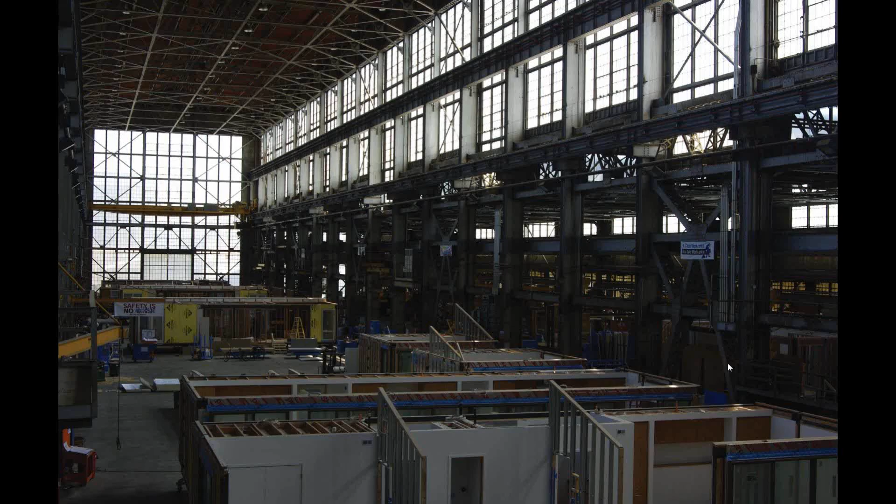So this is what the factory looks like from the inside, and on the right is the line. Here is Zone 1, where they're fabricating steel. In the distance you can see Zone 2. Mouse isn't working, there we go. So here is Zone 2 as well. Zone 1 is all steel, Zone 2 is where they're actually putting in the walls and all the systems, and Zone 3 is where they're doing finish work. Is there a Zone 4? No.

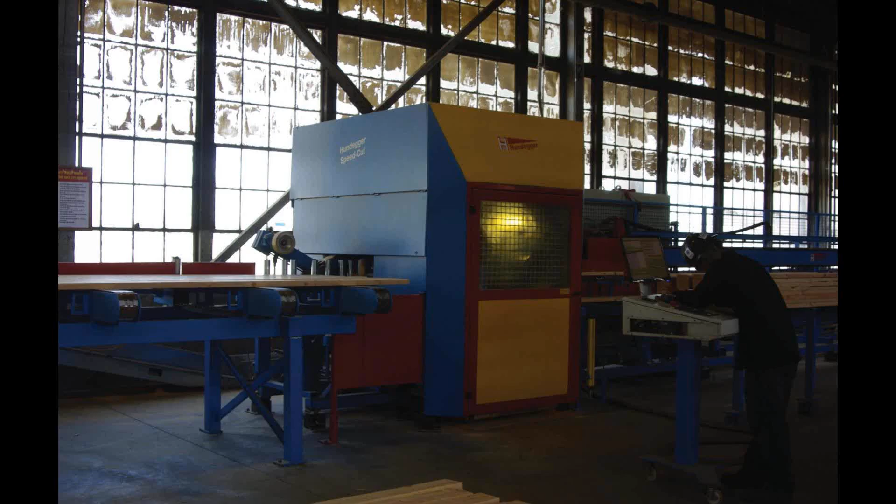Here is the Hundegger, which is actually programmed to cut all of our studs to length. We'll get into that in a minute, what the shop drawings kind of look like in terms of how they input that information.

For some of you that might not know, we used to be using a Newcon system, which is a steel stud system. That machine was incredibly finicky. While interesting and maybe high-tech, and some clients were really excited about it, it was really difficult to work with in terms of its programming, and we were adding lots of wood to it anyway afterwards, so it wasn't really creating the efficiencies we would have liked. So now this is the kind of machine that is helping us with efficiency in the factory.

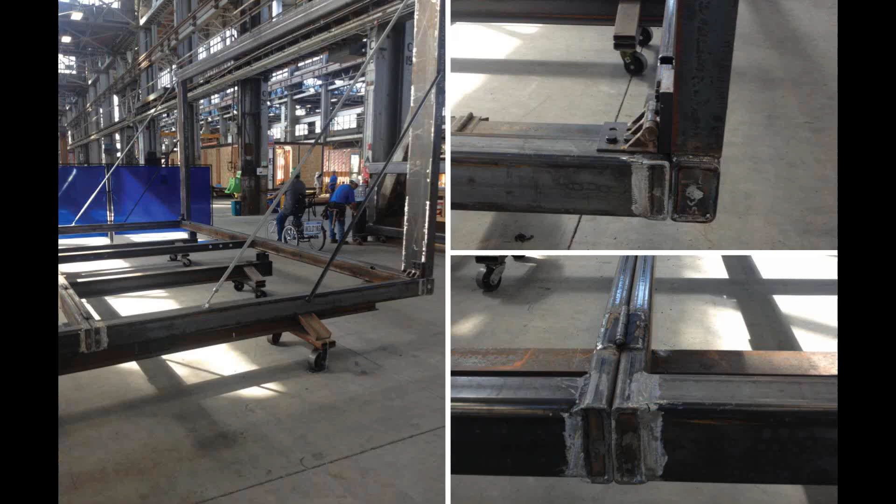Just showing some of the steel details. This is a breeze space, which is a mod C for the breeze house. You can see on the upper right the hinges that are bolted in place to allow this panel to fold down. Then you can see this hinge here at the line of the floor, where the floor would fold up and fold towards the center of the breeze space.

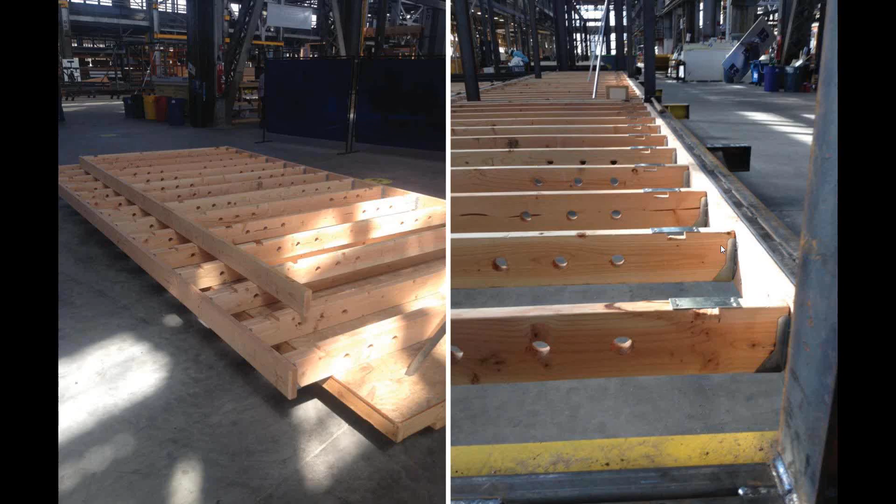These are our floor inlay panels. As you can see, there's actually a rim joist that our joists frame into that's set inside the steel. You might ask why we don't just hang off of the steel - part of that is they want to be able to build these off on tables, so they're not building them in place. They're using the factory for what it's good for, and in theory able to hoist these into place with simple gantries. Right now they're doing it with manpower, which is creating all sorts of problems we'll get into later. But you can see the holes we're creating for plumbing and electrical zones, as well as these notches that allow the radiant to run from one bay of the floor joist to the next. Those are all program cuts into the Hundegger also, so those are spit out by that machine, ready to go and be assembled on the table.

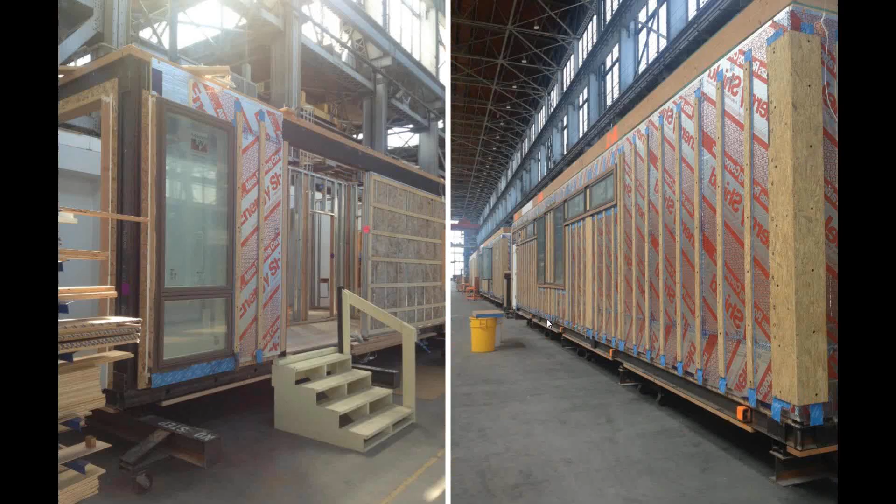So some images of some mods on the floor. Andrew Bodley is not here, he took these photographs, so I'm not exactly sure what projects these are.

But I was really trying to illustrate here both what kind of happens before the sheathing goes on, but then afterwards, after we have the weather barrier and we actually put our strapping pieces that execute our rain screen detail before we put on the siding. So just what that all looks like before the siding goes on.

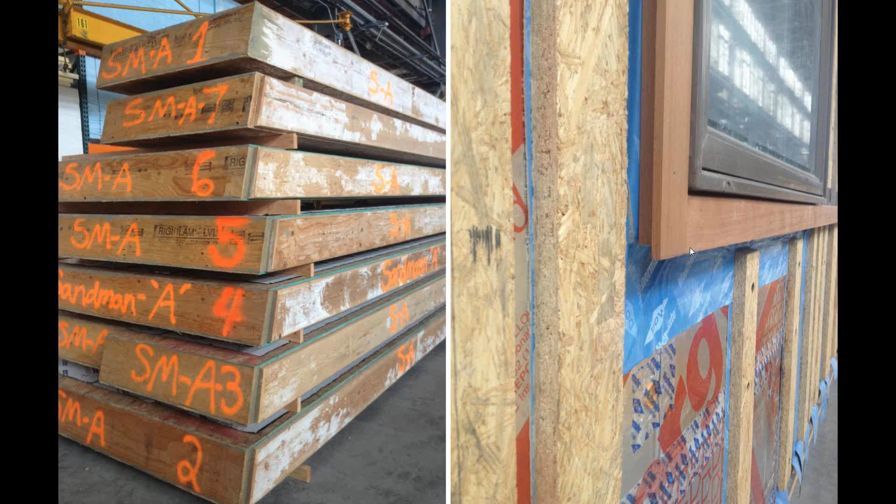A zoomed-in detail of our window trim, which I think Andrew had sent to a few of us, just illustrating how these are ripped in the shop to allow for siding to butt up behind it, and again how the strapping works with that.

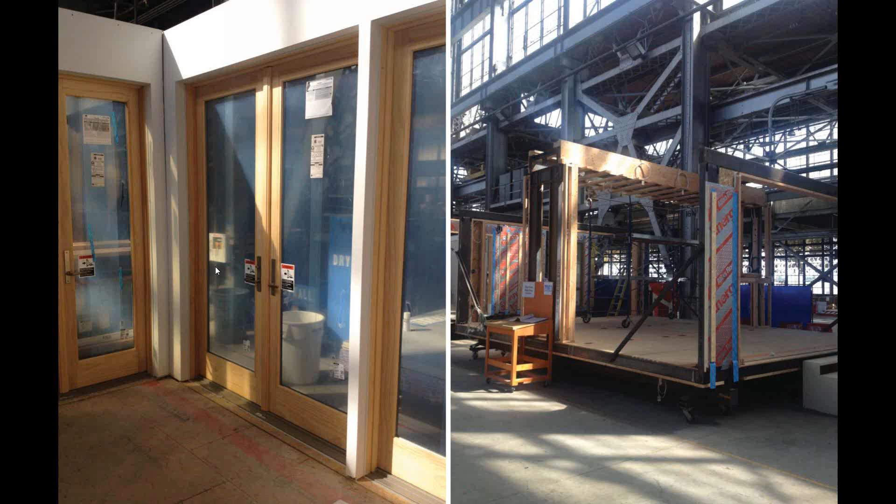Two images, one showing more detailed finish work of how the Andersen patio doors look on site. These are outswings, and what the breeze space actually looks like without the clerestory piece.

I think I have an image that shows the clerestory piece as well, but this kind of furred down ceiling allows for our light trough and a few other things, and in some houses we'll have a fireplace that surrounds this steel.

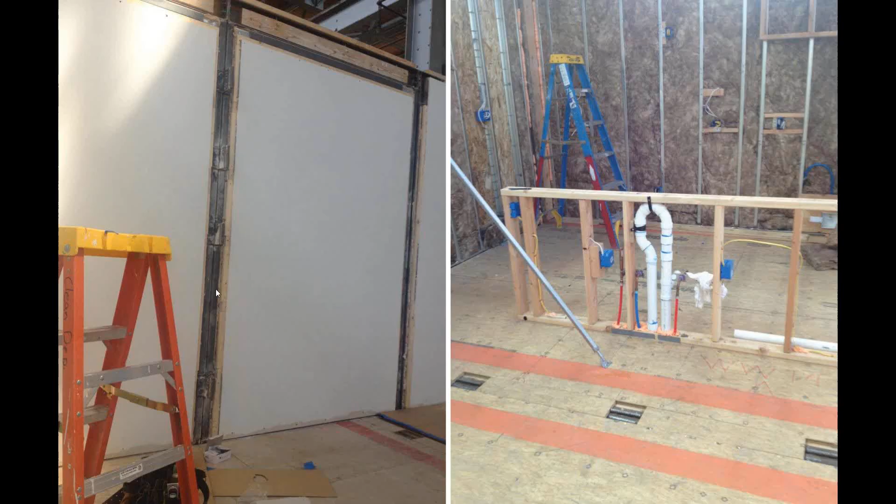Wanted to show how we deal with the hinges once the house is complete, two different ways. Some are actually bolted on and then removed once we get to site. So this is a side wall of a mod. I believe this panel is a fixed panel, and these two panels unfold and create the living space generally. These hinges are then removed so the drywall can be put in place afterwards, that last strip.

In the floor, they're much smaller in terms of how much they stick out from the steel, so they actually work and are kind of just hidden. They come pretty much flush with the subfloor, so the finished floor just goes straight over top of this.

And I'm sure some of you have wondered how some of the island plumbing works. This is a subwall for a kitchen island with the outlets on the side as well, and these outlets for a disposal or a dishwasher.

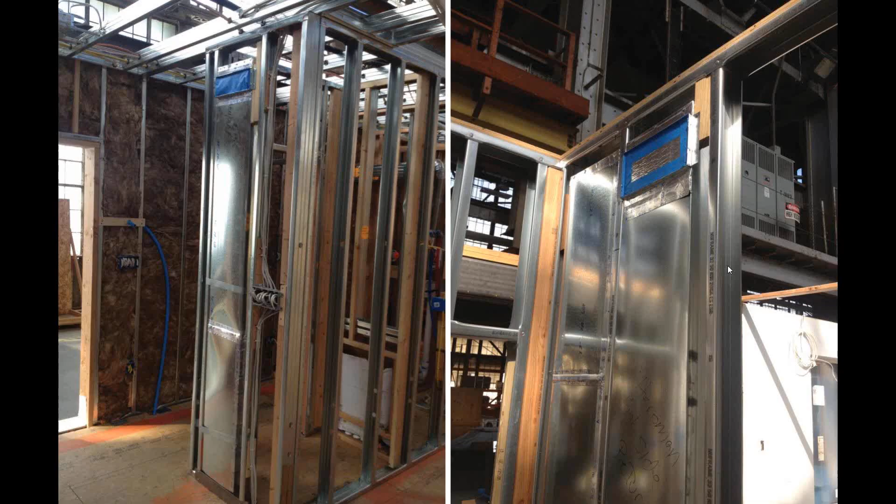So this will be a key image as we get into some of the other issues, or some of the shop drawing issues. This is a 2x4 wall that has a high register, I'm not sure if this is a supply or return, but as you can see, it pretty much takes up the entire bay. If you're trying to mount anything or have a light switch below a register, kind of impossible.

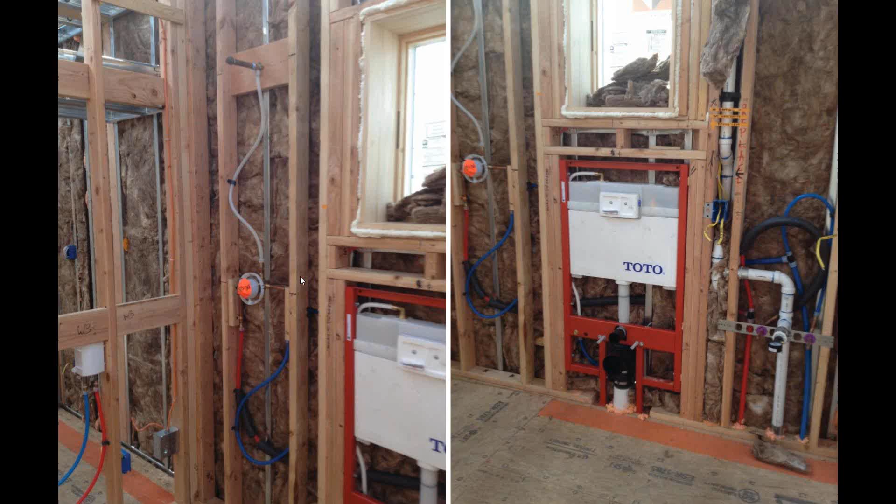I wanted to show this image to show what's happening in some of our bathrooms behind the finishes. On the left here we see the plumbing for the shower and the shower head, the control, blocking for I think future grab bars. On the other side is blocking likely for cabinetry. And I think this is a big one that I've seen some discrepancies with in some models.

This is our in-wall tank for our toilet, and this keep-away element is built into the family. If we're doing an in-wall, for most projects, that means we have to switch out the window, or the window that we spec comes down a little bit further. I don't know if it's all the way here or a little higher up, but the windows we typically spec above toilets in a lot of projects won't work. So you need to be cognizant of what the keep-away element is and how far you need to stay away from that.

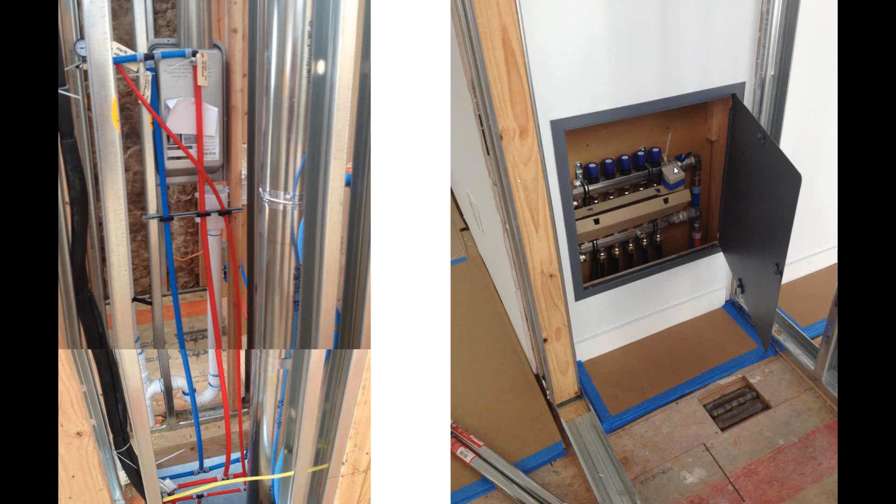Just more in-the-wall stuff. This is actually what our manifold looks like in an access hatch.

So yeah, I don't know if everyone was hearing that, by the way. Sorry, what did you say, Jeff? Why are you kicking me? I don't know, all right.

Well, anyway, more stuff that goes in our walls. Obviously, as we were saying, this is for kind of laundry stuff. And again, things that we need to be aware of.

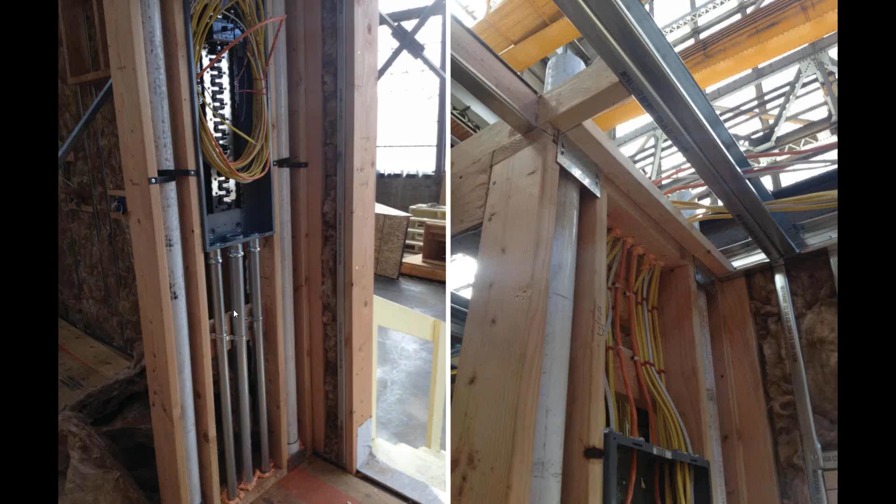In terms of our electrical panel, as you can see in this stud bay, it's basically completely full up. This blocking piece is actually to stabilize these tubes that come down from it. But say if you're trying to put a register below an electrical panel, obviously you can't do that, or say an outlet or anything like that. I think there's some wiggle room because of that blocking piece to have something that might need to be blocked on the other side. But in general, I think we should be keeping away from below the electrical panel, and then obviously above it as well, with all the wires that need to come out of it.

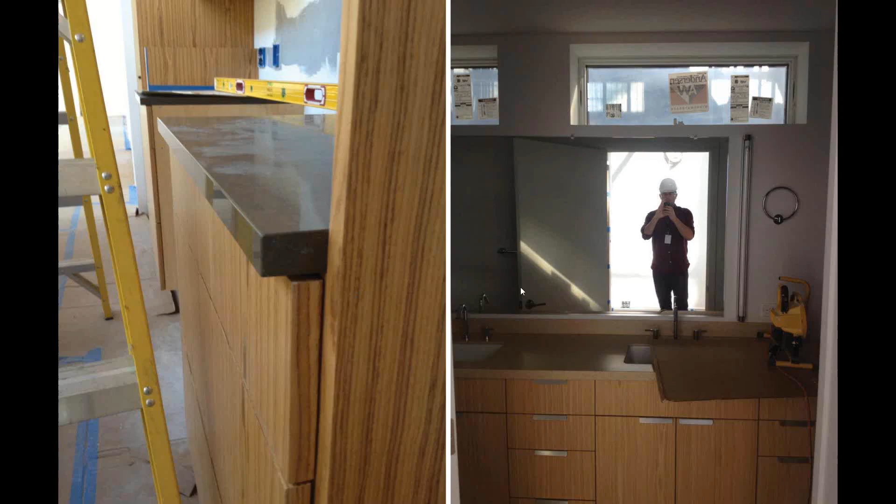I wanted to show these two images just as a note on what some of the finishes look like, but also maybe as a question for Carolyn in terms of the cabinetry.

I think right now we're speccing an inch of overhang from the box. 3/4 of an inch from the box. Okay, so what Carolyn's saying is that right now we're speccing 3/4 inch from the face of the cabinet, face of the drawer. Correct. And so I guess what I'm questioning is, this obviously looks like it's 3/4 from face of the drawer, and I don't know if this is an outdated detail or if we're not relaying the information or what's going on, but it was something that Andrew took the photo of and I just wanted to bring up as maybe a talking point or a question.

I think all of the updated cabinet drawings and procurement drawings that Carolyn... Sorry, Jeff, what do you got? It's supposed to be 3/4 inches off the face of the drawers or the doors or whatever you want to say, not from the cabinet frame itself. So that is the right detail.

At least from here, it looks like it. That would make sense, but I've been told by people who read my drawings that it's 3/4 of an inch from the box. Okay, well, it sounds like there's some discrepancy there. Carolyn was working with the cabinet manufacturer on these drawings, and I think what she's saying is she was getting red lines that said 3/4 of an inch from the box. I think we were all in agreement that 3/4 of an inch from the face of the drawer or door makes more sense in terms of what it's going to look like in finish and giving some tolerance.

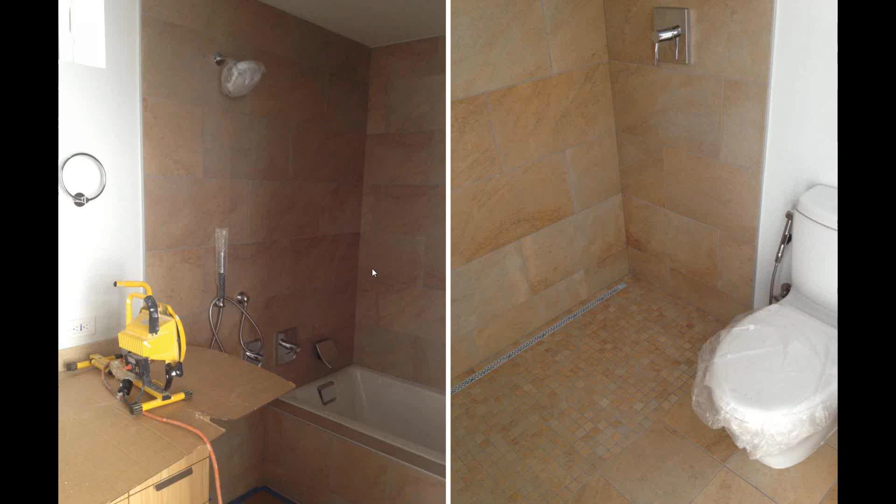So again, seeing more finishes. Probably most people haven't necessarily seen what some of our bathrooms are looking like. Obviously this is in process, but this is a situation where we have a shower tub combination.

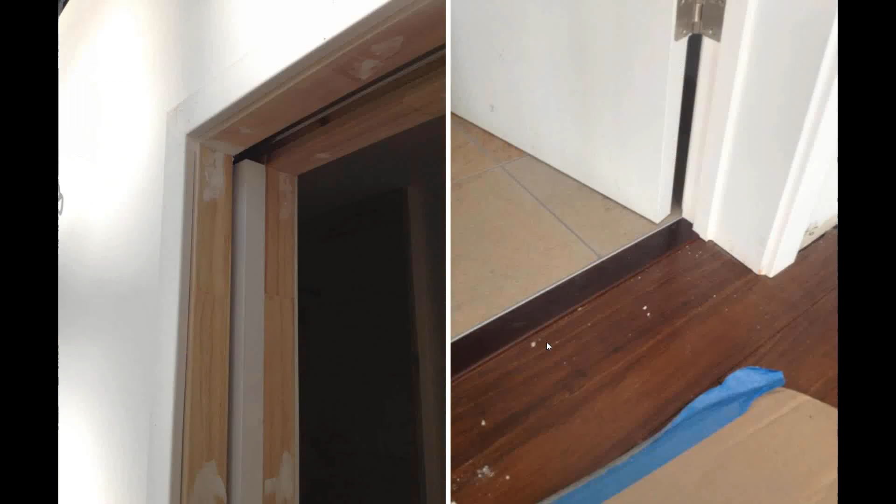I wanted to show these two things. Probably a lot of people haven't seen what a pocket door really looks like. This is in a 2x6 wall, and we actually have a pre-manufactured kit for it. Typically, if you're doing a one-panel pocket, it's in that wall, but if you're doing a two-panel pocket going into the same pocket, that's a 2x8. Ryan has a project trying to do 3 pockets, 3 doors in the same 3 panels into the same pocket, so in theory that would be a 2x10 wall. I don't expect to have many of those, but anyway, just to note, what they're really doing, if not using a kit, is turning the framing on end, so you have 1.5 inches on either side and a 2.5 inch cavity to accept the panel itself.

If we're looking at this, I know it's been a question, it was a question I had at a couple of moments. It seems like the detail we're doing at the transition between tile and floor is that the tile stops at the inside of the bathroom, the wood floor continues, and the threshold, maybe about an inch, is between those two materials. So I think in terms of how we're modeling it, the wood floor should go up to the tile floor, as opposed to splitting in the middle or, in some cases, just leaving it blank. It's a minimal amount, but it's something that would add to our count.

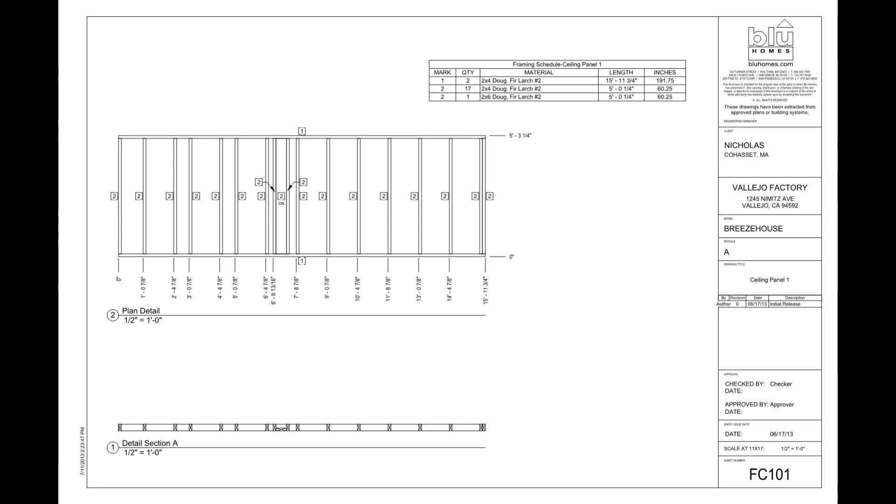Hey Andrew, that's for both exterior walls and spine walls, right? Not just spine walls? Yes, but the thing with exterior walls is we're not running any ducts into exterior walls. So while it's probably important to be cognizant of that grid, on the exterior walls it's not really something that's affected. It's more in the spine wall and the ceiling panels.

I would say the drop ceiling panels. Where it doesn't come into effect with the exterior walls is where the intake and exhaust vents come out. That's the biggest thing you have to worry about in terms of dealing with the grid and exterior walls—you don't want to be placing an intake or exhaust vent right on a grid line.

But so that's kind of how we're seeing the Moonies working out.

Hey Andrew, it's Steve. I was talking with Rod this week, and he basically said unless there's really a reason not to do it, we'll try and keep the exterior Mooney walls on that grid too. He said even if there's not a duct going through it, there are situations where part of the framing is concealed and part exposed, and it's a lot easier for carpenters in the factory to use visible studs as a reference point and measure over, so it makes overall coordination easier, even if there isn't necessarily a duct that has to line up. So there's a little more flexibility in stud spacing with the Mooney wall, but if there's nothing objecting to it, just align it to the rest of the grid.

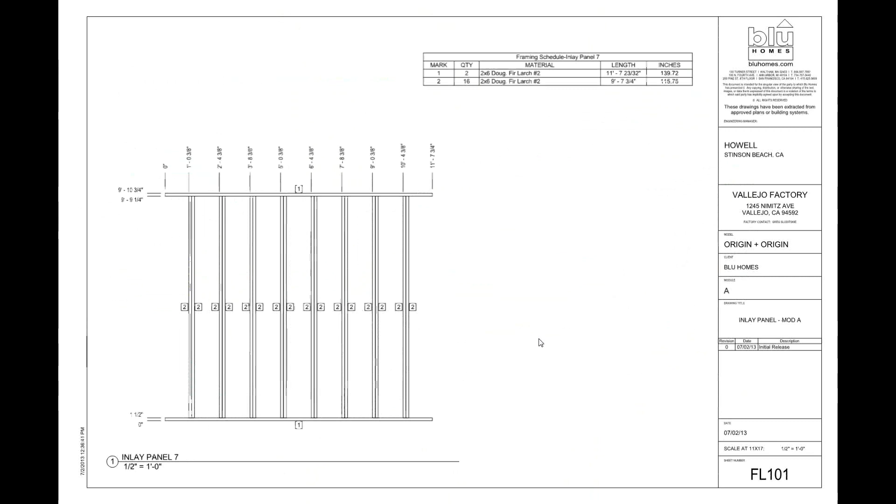All of these things are modeled. They're actually placing studs in the models, and the reality is their directive is they're not allowed to move anything. They're allowed to talk to us about moving stuff, or tell us that something doesn't work, but they're not allowed to actually move stuff. So I don't know if some of you have gotten calls over the last couple of weeks—we've been trying to help the shop team understand which project designers are working on which projects. But that's the reality. It's not that they're saying, oh, I can move this over if I want to. Right now, they're not doing that.

So I think that gets to Sarah and Yvette's points, and a few other people's, that we really need to get back to these factory kickoff meetings, so it's like, actually, I don't really care where those registers go, I just kind of place them for now. They need to be high, and in this general area, but you can move it if you need to. Same thing with outlets, but this outlet needs to be here because it's lining up with this track that's up on the ceiling.

You're right, they're not seeing that, but they're also not changing it without our approval. I was getting the opposite impression, but you've been working on more shop drawings than me, so. They're not touching the model. That's just... whether they're making those adjustments in the field or factory or not, that's a different story, and I have my suspicions that they are. But the shop drawing team is not touching the model.

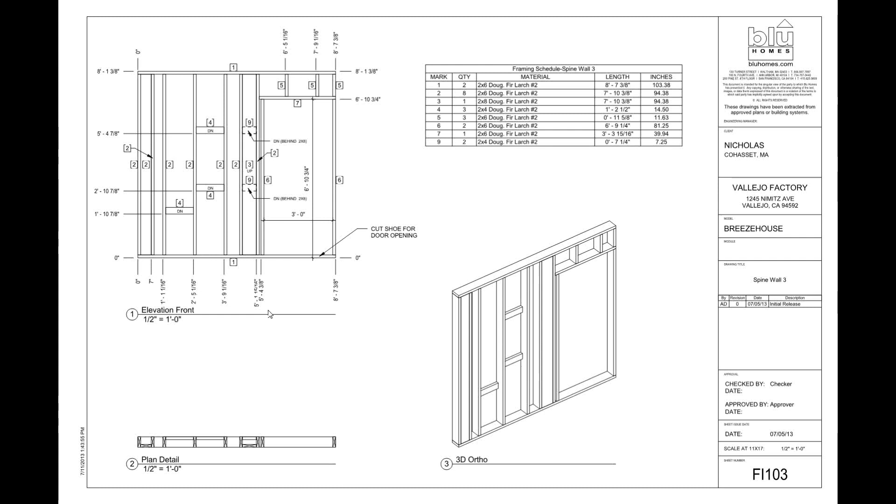This is a kind of typical cage, a spine wall, so this is a 2x6 wall with a door, I believe, into one of the bathrooms. They call out and tag each individual element so the guy on the floor knows what goes to what. They start at base point and run left to right, bottom to top. So again, in theory, they're using mostly the 16 on center. Obviously here there's some differences, but that's really what they're trying to do. As this drawing shows, they get this kind of layout plan that tells them where all the drawings go.

This kind of arrow icon, which is a little tough to see at the moment, you can maybe see it better here, tells you where to start the wall and where to end it. But I think showing some of these wall panels illustrates the point that some walls we have a lot of...

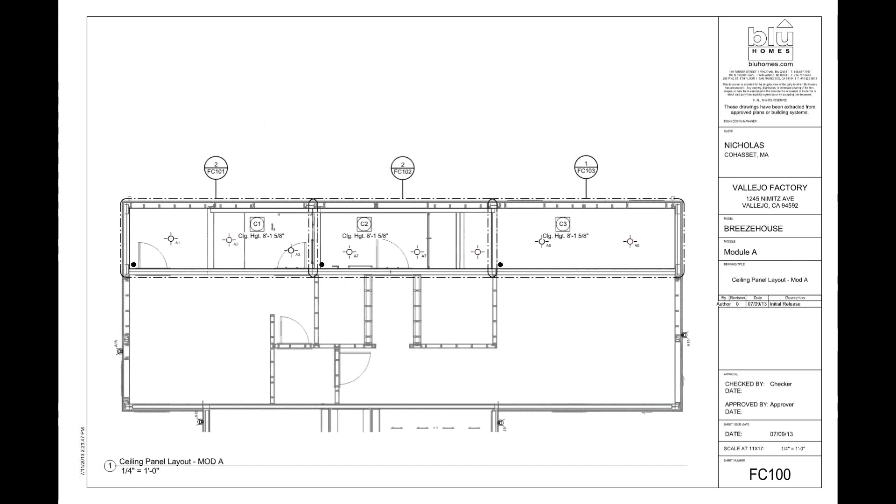I guess I didn't put the one in that I wanted to. Kevin would probably know the one I'm talking about that basically had, I think, like 30 different pieces of blocking for one of the bathroom plumbed walls because of the cabinets, because of all the shower elements. There's a lot going into our walls, especially in the bathrooms.

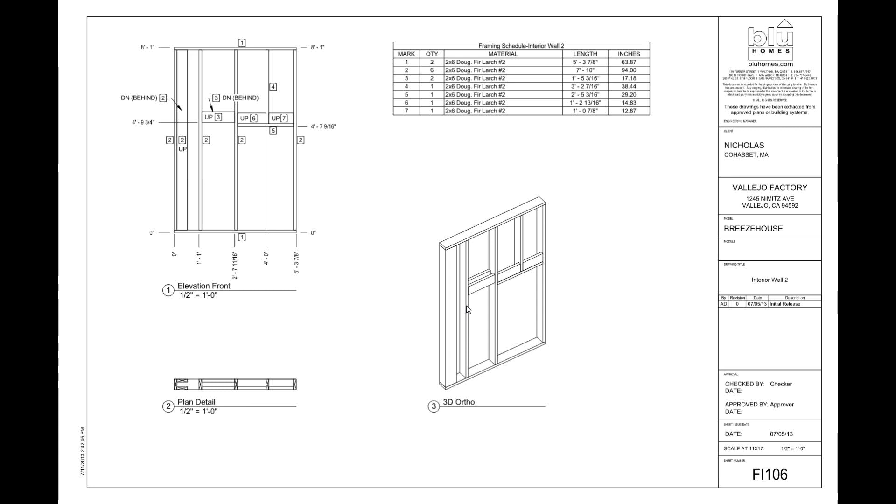And I think that just gets back to the point that we really need to be cognizant, say, if we have a register, that basically nothing can go below it unless it's a 2x6 wall, and then it can go on the opposite side of the register or the opposite side of the wall, or it needs to be moved to the side if it's a 2x4 wall. Additionally, in this house, in Nicholas, there was a wall-hung toilet here, and in this bathroom there was blocking for a towel rod that was needed, and those things conflicted. Same thing over here, there were two different towel rods and registers above, one a return from the bedroom and one a supply from the bathroom, and all of those things conflict. I think those are things we on design really need to be aware of.

And I guess that's probably all the time we have, but I don't know if anybody has any other thoughts.

Hey, Andrew. Hey, Kevin.

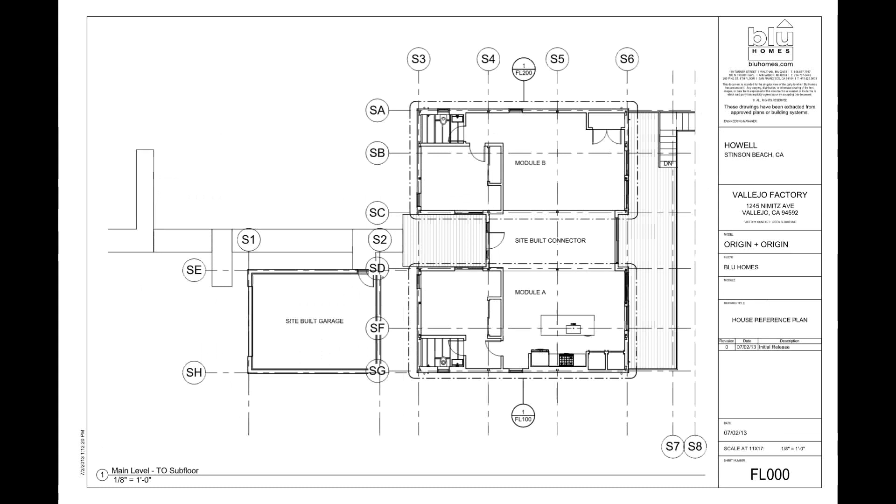If we do have a duct and something like a towel rod or an outlet or switch in the same wall, one facing one way and the other facing another way, is it possible to get both in the same wall if it's a 2x6? Yes, the duct we typically spec is a 3¼ inch duct. So in a 2x6 wall, as long as the register faces one way and the towel rod or whatever faces the other way, that's possible.

Couldn't you theoretically just pull the duct over a little farther? They have to be in separate faces. Well, it comes out of the register and either goes straight down, or couldn't it go over a bit and then turn down? So what Ryan's saying is that if they're facing the same way, as long as the duct is justified behind the blocking and the register comes from the top with a longer turn piece, that's possible too. Yeah, I hadn't thought about that, but that makes sense.

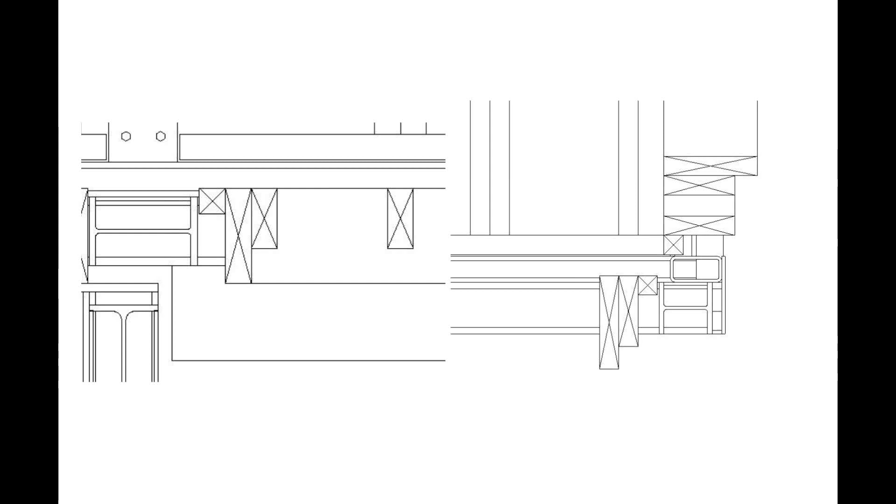I bring this up because our bathrooms are really tiny, and people want their towel bars, and we're going to have to get a supply in there somehow. So it might be a good standard practice or solution for when someone wants a towel bar and you have to fit a duct in there. Yeah, no, absolutely, just change it to a 2x6 wall.

It's something I thought about with Nicholas—it might not be this bathroom, might be the other one in Mod B, but in that other bathroom this wall was changed to a 2x4 wall, I assume for certain clearances needed in the bathroom, and that was the kind of issue. So I think, Kevin, the point is well taken—if we're trying to fit a bunch of different stuff in one wall, by default going to 2x6 makes sense. I don't know that it will always work in every scenario, because that means the whole wall will probably have to become 2x6. What about the flat blocking we used to use?

This is a 2x4 wall. Sorry, Jeff, what did you say? We used to use this coil stock metal for the corner walls, supposedly, putting blocking on. Why couldn't we use that?

My understanding is the Newcon machine is being put offline as soon as we're no longer selling it. I think the only reason it's still operational is that some clients have specifically stated they want Newcon walls no matter what, and that's how they were sold the house, which sounds ridiculous but it's true. So to answer your question, the factory will likely balk at using anything to do with the Newcon as a detail or workaround.